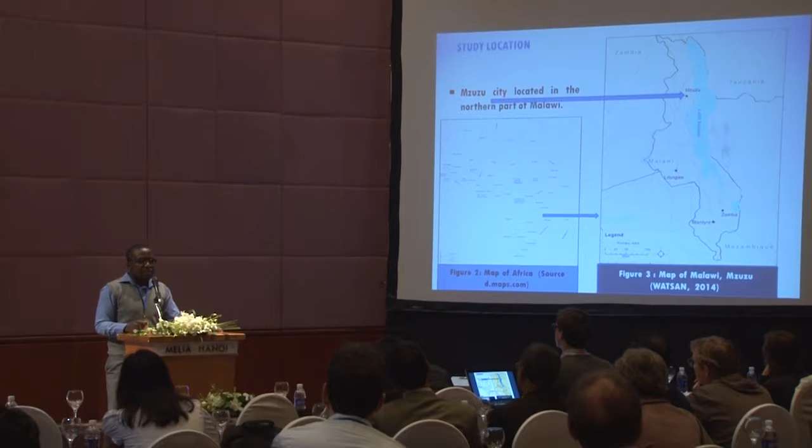The major challenges being experienced in Mzuzu City is lack of appropriate pit desludging technologies. In Mzuzu City, there are vacuum tankers that are run by the municipal authorities, but also by private operators. These vacuum tankers mainly patronize the planned areas and empty septic tanks.

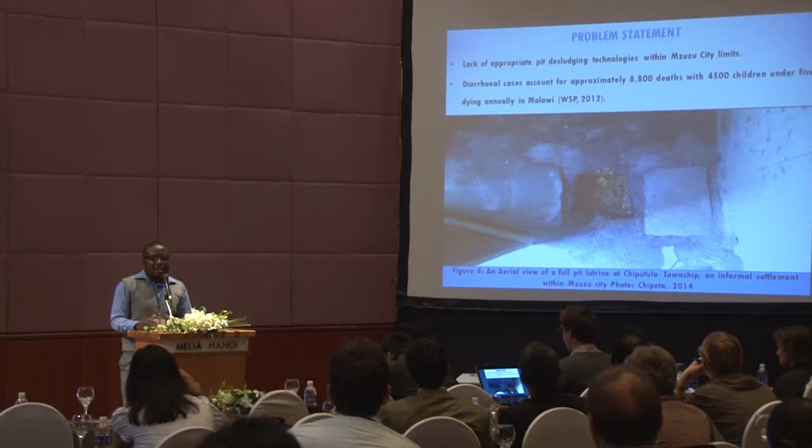Here is just a picture from one of the informal settlements, Chiputula, just to highlight that this is an aerial pictorial view of a full pit latrine, which we try to alleviate by possibly suggesting physical technologies that are relevant and contextual to Mzuzu City.

Just a bit of background. The main criteria focused upon on the technologies is that we thought of developing a technology that is low cost, effective, safe, and sustainable. Within these parameters, when we did the literature research, we focused upon modification of the treadle pump.

These are pumps that are normally used for irrigation, and they depend on the suction power to empty, and they use treadles that manipulate a rope which is surrounded by a pulley, and they use piston strokes that move up and down. The upward stroke sucks up the sludge in this case, and also the downward stroke pushes the sludge so that it can move to the discharge pipe.

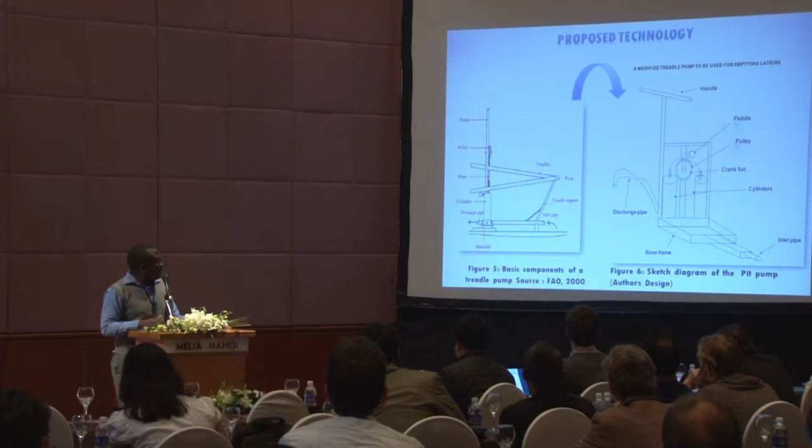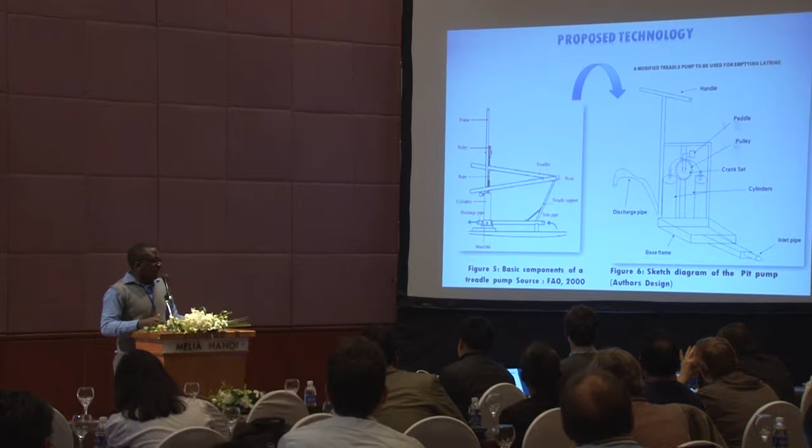So, on the other part is the sketch diagram of the pit pump, which is the conceptual setting. What we did is just to replace the rope with a bicycle chain, and also to put pedals instead of the normal treadles that are there, so that we can see if possibly this can also be used as another technology for pit emptying.

Discussion on the changes we have made regarding the pros and cons of the technologies are as follows. Firstly, we believe that the technology can potentially be low cost and sustainable because all the materials being used are found available locally, whether it is the chain parts or the other nuts and bolts, available in many shops in the developing country context.

Again, we believe that it can potentially be easy to operate because it can be almost like using a bike, so that it is literally something that people can easily adopt and use.

On the safety part, we are looking at the possibility that because the treadle pump allows you to just insert a hose in the sanitation hole, you can possibly cycle outside the pit latrine. This can be helpful, especially in unlined pit latrines, where emptying from inside the pit can potentially cause the surrounding pit to collapse due to weakening.

Finally, we thought that for this technology, the major advantage can be that pumping with leg muscles can be potentially more useful and less straining than using upper body strength.

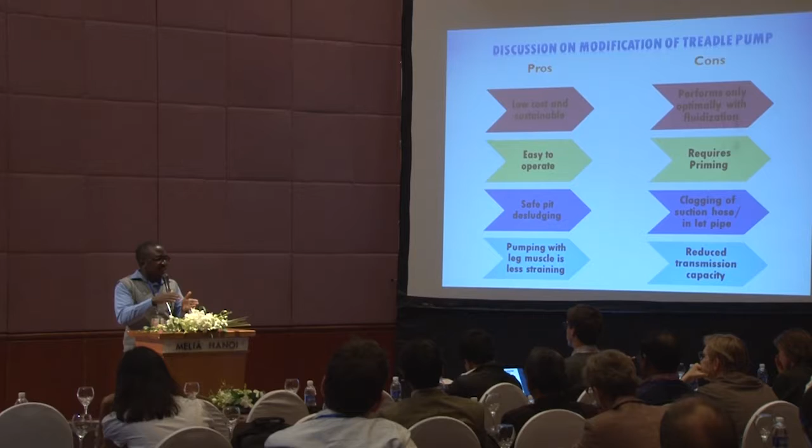This concerns the material itself that we are pumping out. When moving through the suction hose, materials such as sludge can possibly stick to the inside of the hose, reducing the actual working flow and possibly reducing the flow that can pass through.

Armed with that conceptual design, and trying to test out the concept further, we took the concept and started to gather the materials, showing the fabrication cycle. We went to some local welders to show them the design, which in the first instance, as we tried it, did not work.

We had to make some modifications on site, brainstorming on the feet, and test it on some light mud slurry to see what is happening. This was seen as an opportunity for reviewing the design for further phases.

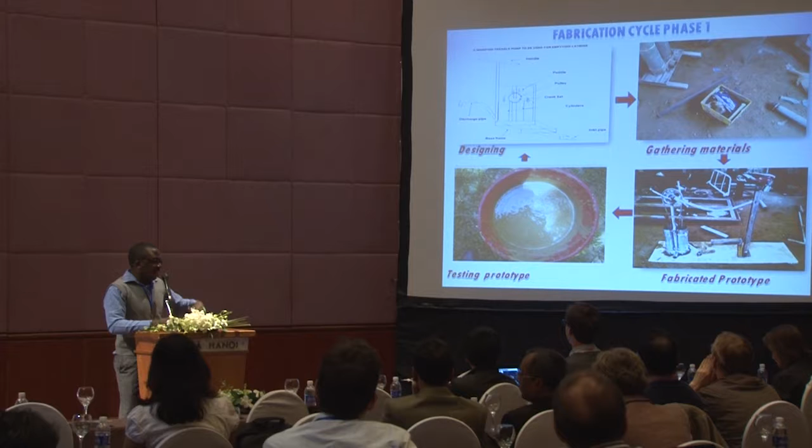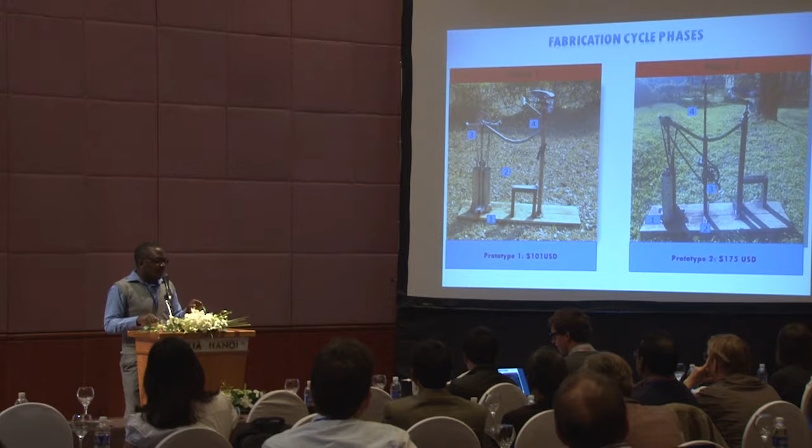In phase 2, we also added a metal rod to hold the crankset, and the position of the crankset has changed, because in phase 1 we were only able to do the half cycle motion, which was a bit straining. In the second phase, we are trying to accommodate a full cycle motion, which we believe can be more useful and easier to operate.

The fourth change is just the changing of the handle positions. Now we will show the video of what we did and what was observed.

In the next phase, what we are trying to do is optimize the pump design, looking at the efficiency, the energy requirements, and the economics, so that we can potentially have a design that works. This can potentially be done by December 2015, which is our deadline.

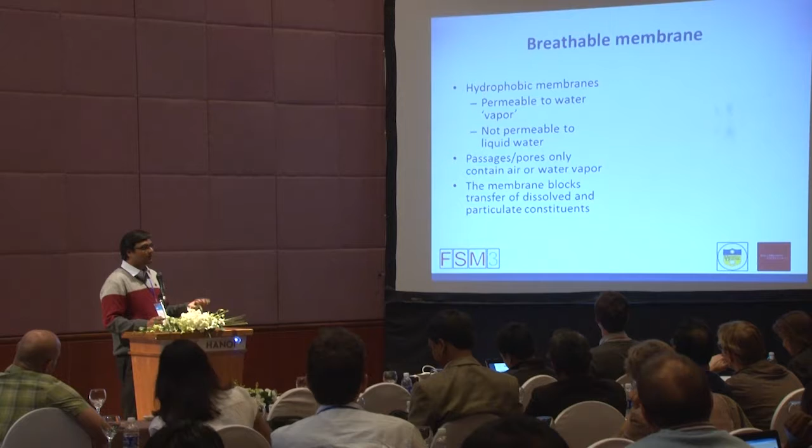So in the start, I would like to define these breathable membranes and what they do. These are pretty much hydrophobic membranes, and the property is that they are permeable to any vapor, like water vapor and air, and it is not permeable to any liquid, like liquid water, and dissolved contaminants present in the fecal sludge. The beauty of this concept is that the pores or passages in these membranes kind of hold only air and the water vapor.

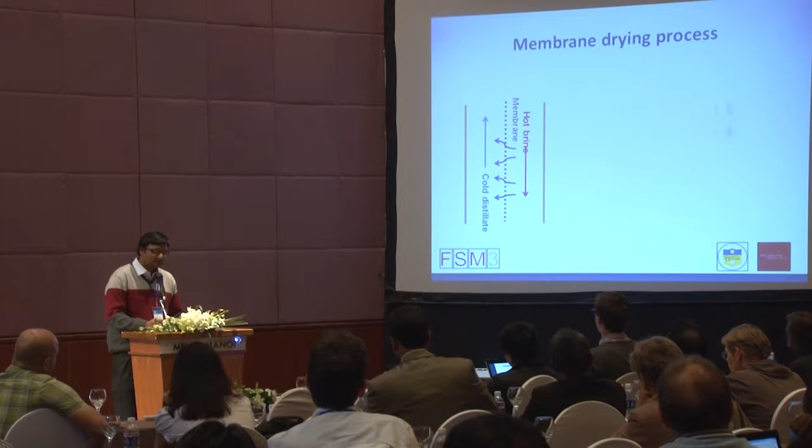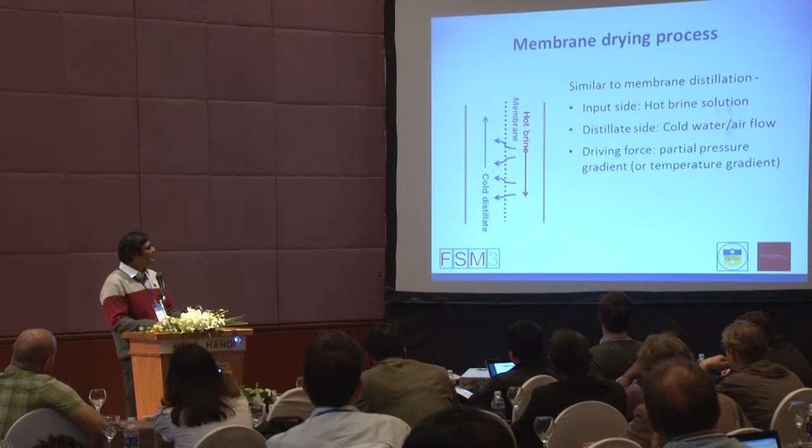So to describe our process, I would like to go through the membrane distillation process first. It is extensively used in desalination processes around the world. We have the membrane in between, with the hot brine solution on one side and the cold distillate solution on the other. Due to the partial pressure gradient or temperature gradient, there is a gradual flow of water vapor from the hot brine to the cold distillate, thereby getting us a concentrated salt solution and a dry solution on one side.

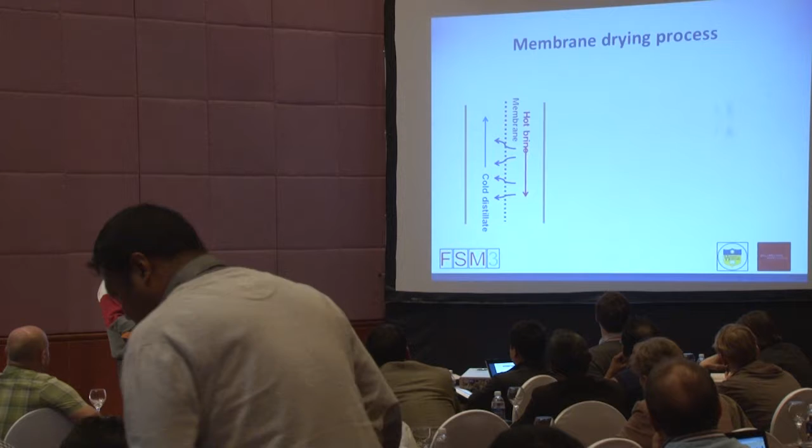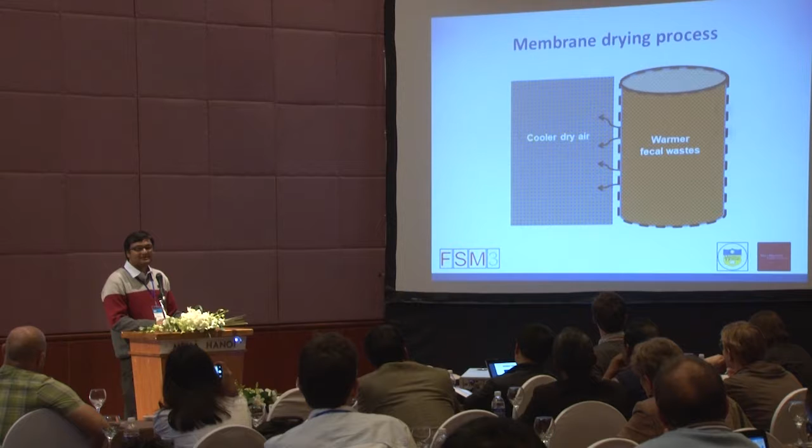To apply this to our context in management of fecal sludge, you can imagine a 55-gallon drum of this breathable membrane, which would have warmer fecal wastes. You have cold dry air on the other side, and as the process indicates, there would be a gradual flow of water vapor through the breathable membrane, and you would have dry fecal matter on one side and pure water on the other.

In terms of field application, we would be testing this membrane system in India, where we plan to start our field testing in Kanpur, in two families, in two locations, two slum areas.

So it's a simple process. You have a squatting toilet, and you attach a perforated drum containing this membrane liner, and with the cool dry air on the outside, you would get drying of fecal sludge as it gets collected during the treatment.

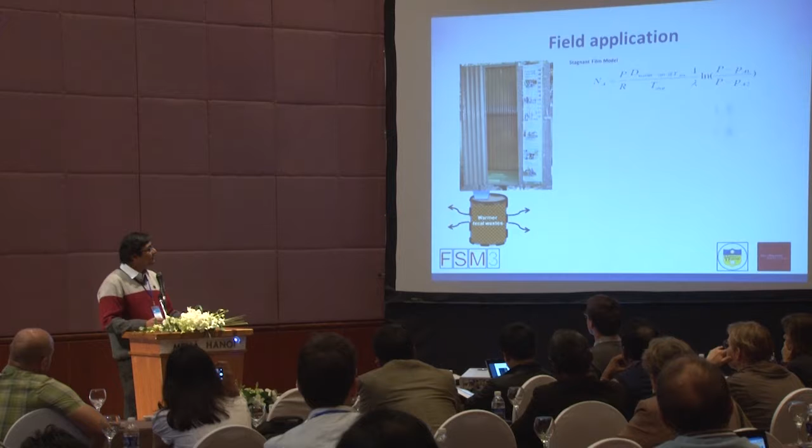Now to get to the sciencey part of it, I'd like to point out that this is what I've been doing for the past 2 years, basically working on trying to describe this process a little better. We now know the equation that governs the flow of water vapor, and it's the stagnant film model that we want to look at.

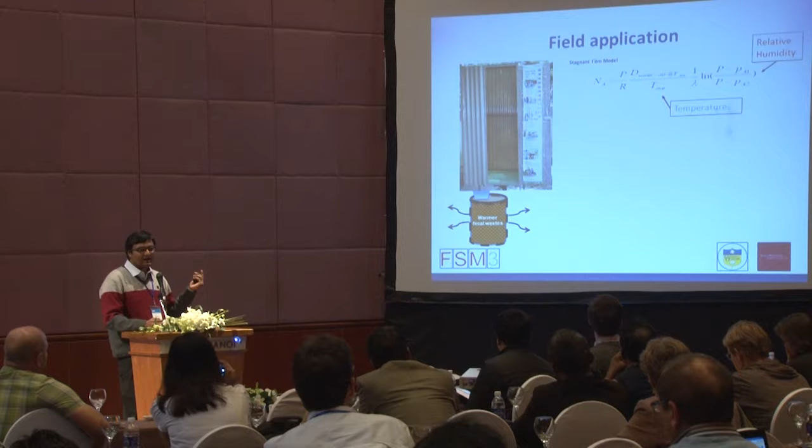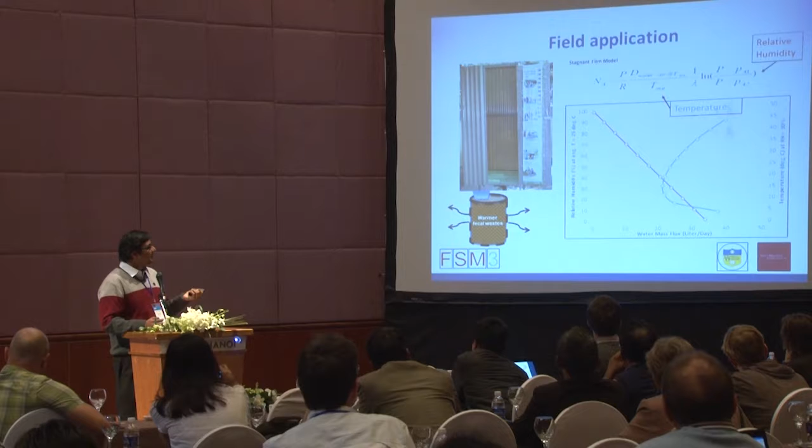As you can expect, it has two major parts that govern this equation: the relative humidity on the outside and the average temperature across the membrane. To give you an idea of how these two variables affect it, this is a simple graph which points out that as the relative humidity decreases, you would have an increase in the water mass flux, and essentially you would have a higher drying rate when you have a higher temperature or an extremely low relative humidity.

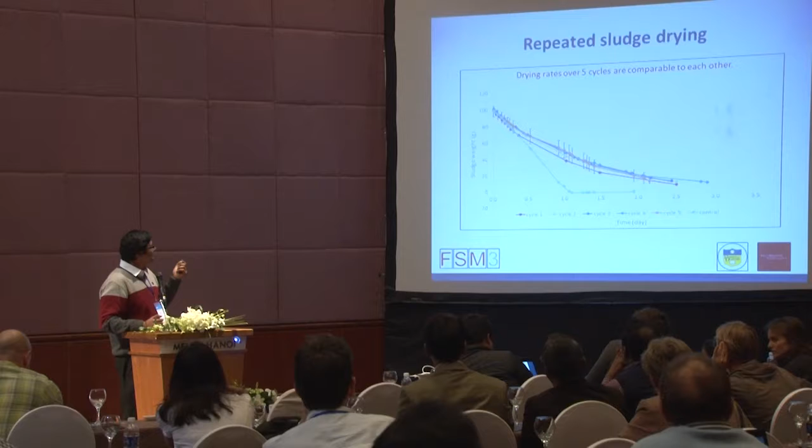So we tested this on a small scale system in our labs, and we've done this a few times. This is a 5-cycle test where we tested one simple membrane with fecal sludge over 5 cycles, and as you can see, the drying rates or drying characteristics are very similar to each other. Over a period of 5 cycles, we did not see much change or loss in performance.

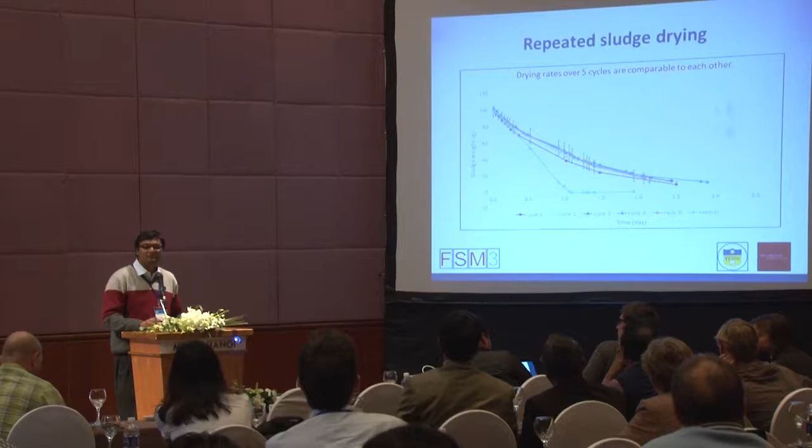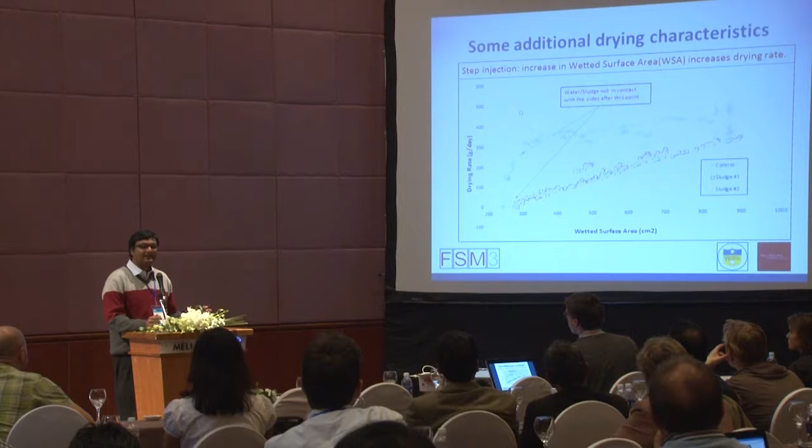We also did some step injection tests, which are more applicable to field application in India. We had a small opening going in and increasing the wetted surface area, which is in contact with the outside air and the sludge. It was indicated to us that increasing the wetted surface area increases the drying rate, which was a good sign.

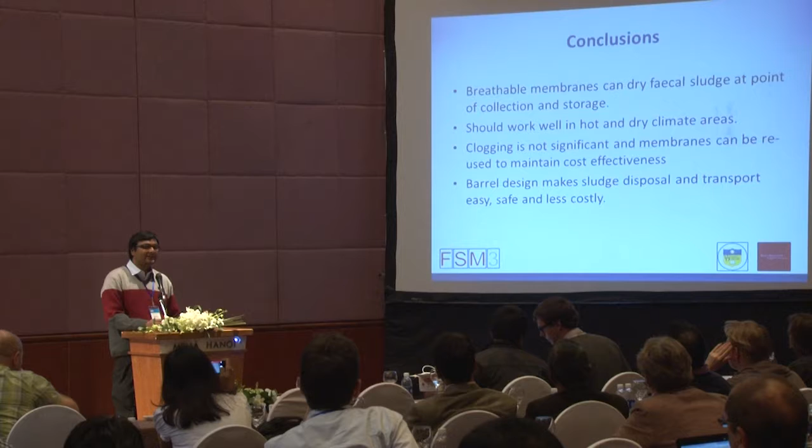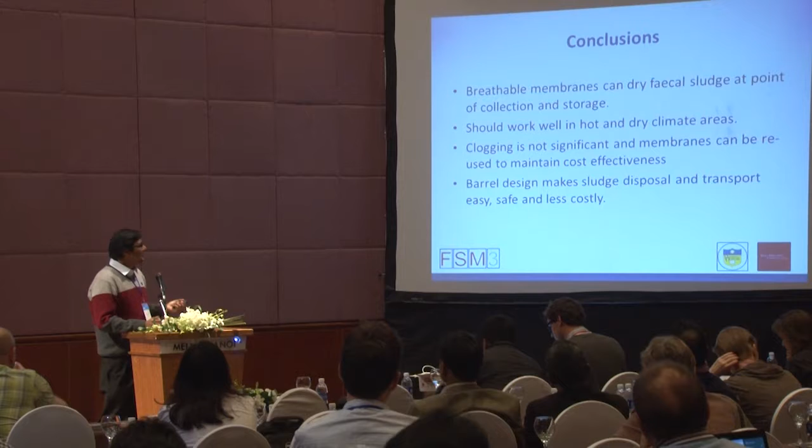In conclusion, breathable membranes can dry fecal sludge at the point of collection and storage. It should work well in hot and dry climate areas. Clogging is not significant enough to affect the process even after five cycles, hence it is reusable and cost effective in the long run. And the barrel design makes sludge disposal and transport easy, safe, and less costly.

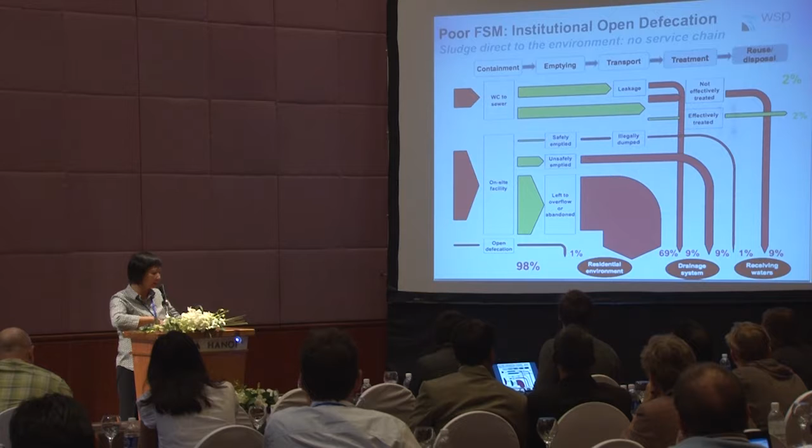So this is an overview of our process. Mixed waste comes in, we have a passive diversion process that dewaters the solid - that's the passive diversion and sand filtration. This is what we showed in the Delhi toilet fair back in March. The liquid goes into the heat pasteurization tank, and the dewatered solid is flash dried and then convective dried. Sorry, the formatting got changed when we switched computers. So the solid gets dewatered in one step in diversion and filtration, then it gets dried, and then the dry solid gets smoldered. Essentially, we're drying the solid and we're burning it. It sounds really, really simple. That's it, just dry and burn.

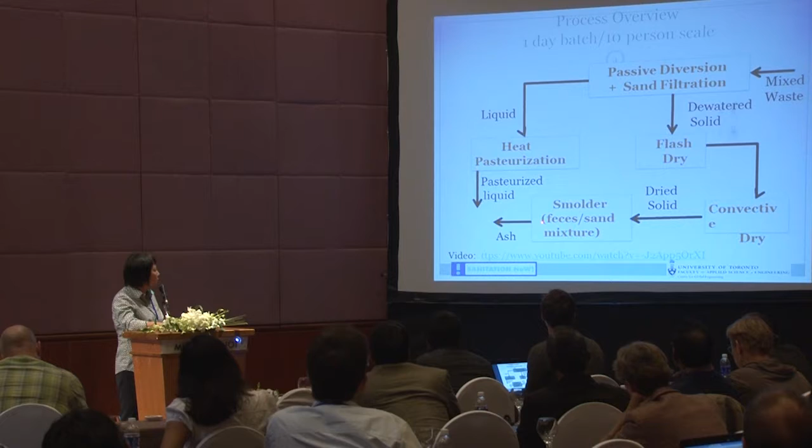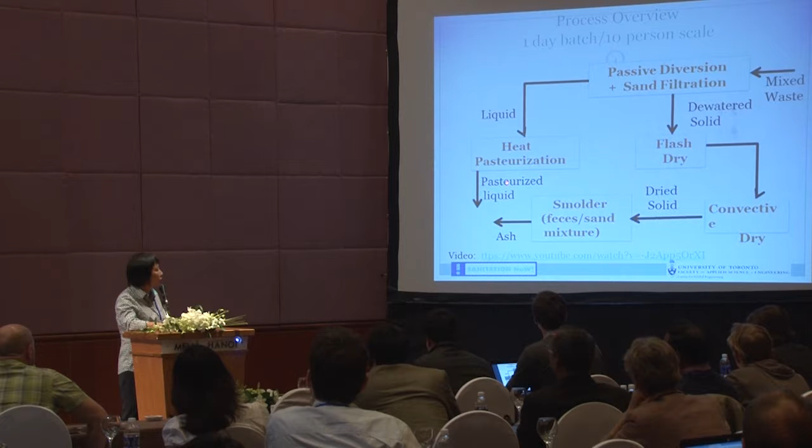What we get out of the smoldering process is essentially the inorganics of the feces. The feces is completely destroyed. The temperatures in the smoldering reactor get up to 600 Celsius, so pathogens are gone, the solid waste is gone, and the liquid is pasteurized. In the phase 2 process, it spends close to 24 hours in a 70 degrees Celsius kill tank.

So let's talk about the smoldering a little bit more. In there, the smoldering has a feces and sand mixture.

So smoldering, for those who haven't heard me talk about this before, the actual chemical reaction is the same as a fuel reacting with oxygen to form CO2 and water if it goes to completion. But instead of an open flame reaction where the fuel is volatilized and reacts with oxygen in the gas phase, a smoldering reaction takes place at the surface of the solid fuel. So oxygen has to get to the surface of the solid fuel and react there. The difference from an open flame is that it's a more controllable, slower process.

You have to provide porosity so that oxygen can get to the surface of the fuel. Feces, being a soft material, is compressible, so a pile of it won't let air reach the surface of the fuel very well. So we mix the fuel with sand, and the structure of the sand provides porosity so that oxygen can get to the surface of the fecal mass. That's why we use a feces and sand mixture.

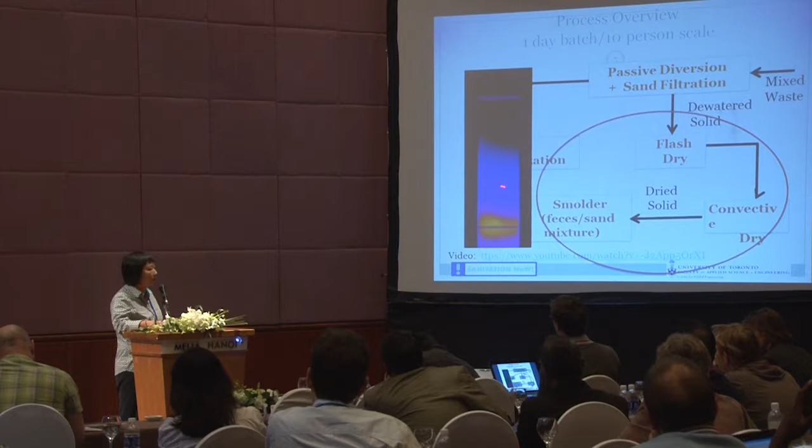This is an infrared picture of a batch column of a smoldering process. We ignite the fuel and sand mixture at the bottom, and as smoldering takes place, it happens in a very controlled fashion. The smoldering front, indicated by the red color, moves up over time, and as time proceeds we finish burning the entire bed of fuel in that column.

That's basically how smoldering works. I've drawn the circle here—there are a lot of different steps, but I'll point out that in phase 2, what we showed at the Delhi toilet fair, the flash drying, the convective drying, and the smoldering all take place in the same vessel. It's a single chamber. That's the overall process.

As I said, with smoldering we make use of sand. Even though sand introduces complications in material handling, we take advantage of the fact that the sand can act as a thermal battery. When we generate heat by burning the fuel, a large fraction of that heat can be stored in the sand. So we think of that sand as a thermal battery.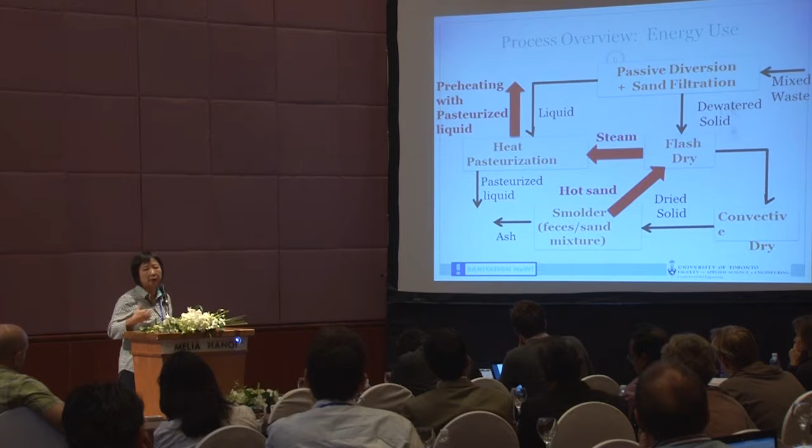So the energy management aspect of what we're doing: we store the heat generated using the hot sand as a thermal battery, and we use that heat once to flash dry the feces, a second time to heat up and pasteurize the liquid, and a third time to preheat the liquid going into the tank.

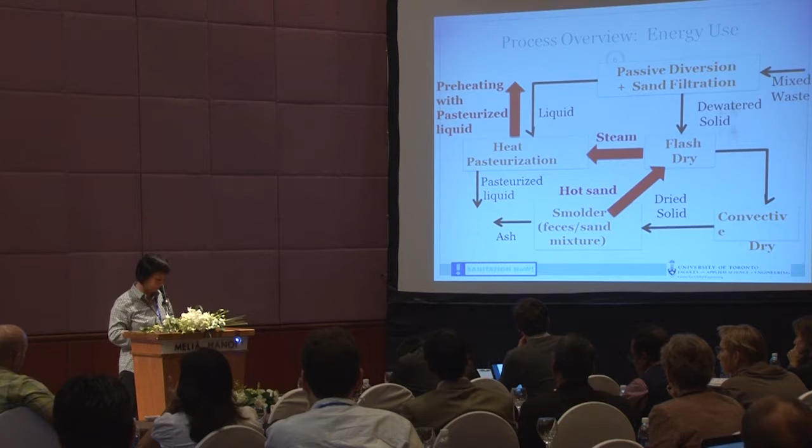There are a few things that we didn't like. One was too big, and obviously at this size it would be kind of expensive. But we also didn't like the amount of energy that it used, 4 megajoules per day.

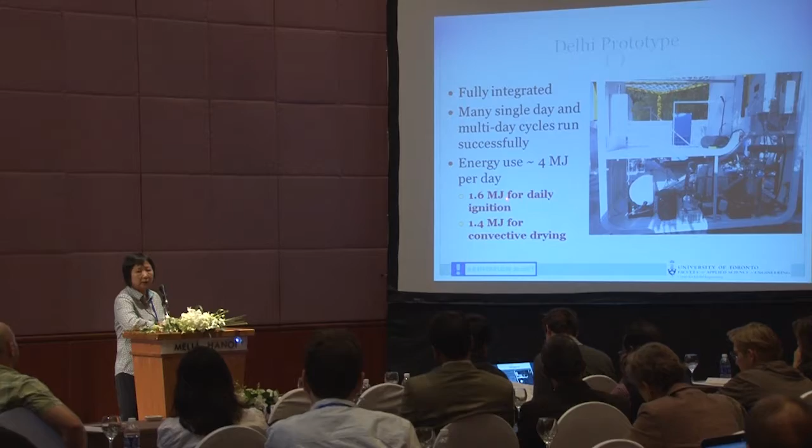And we did a very careful analysis of where all the energy costs came from. The two biggest energy cost items were the daily ignition. To ignite, to get the smoldering process going, you have to ignite the fuel at the bottom. It took 1.6 megajoules for that every day. And the second was 1.4 megajoules for convective drying.

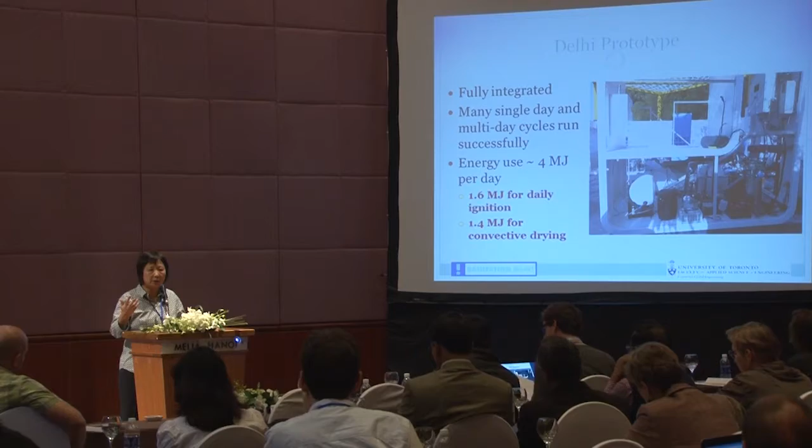So what happened was that even though this flash drying worked really well, it didn't get the feces dry enough to the point where it would smolder. So we then would pump air through this mixture in order to finish drying to the point where we could. This actually turned out to be, in hindsight, a really stupid thing to do. It's very inefficient and cost a lot of energy. I won't go into all the reasons why, but that's why.

So the lessons we learned from all that at the end of phase 2 was, and there are many things, but I'll just highlight the things in red. We like the fact that we use sand as a thermal battery, and as I said, we were able to make use of the heat generated in a very efficient way. We like the process of flash drying because it was so fast.

The things we didn't like: the energy we had to spend to ignite the fuel every day, and we didn't like convective drying. Not just because of the energy cost, but also if we're bringing air from the ambient in order to dry the fuel, then that process will be very dependent on the ambient conditions. Under high relative humidity conditions, that process will become even slower. So we want to remove convective drying in the next step of our process.

So just to say a little bit more about the drying and dewatering aspect of things. Healthy feces is about 3 to 1 water, 75% moisture content. Our smoldering target, if we can get it down to 1 to 1, then we could burn it very robustly. We could do it at 60% as well, which is about 1.5 to 1. But 1 to 1 is a robust number.

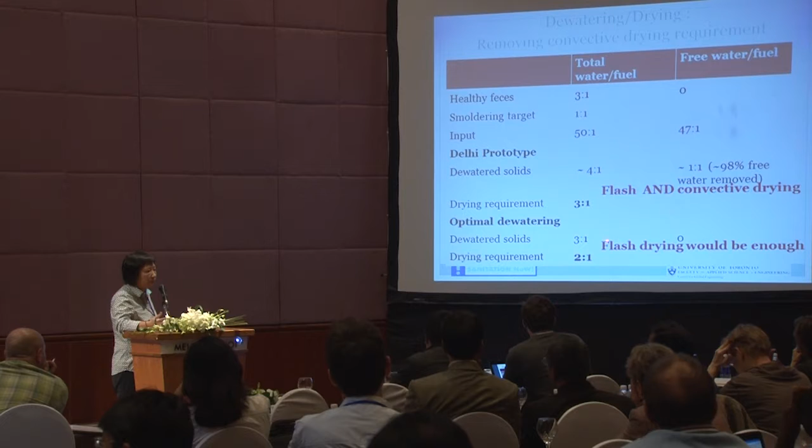We got rid of about 98% of the free water. So if you compare these two numbers, that's great. But the energy we had in the hot sand wasn't enough to flash dry this 4:1 down to 1:1. But if we were able to remove all of that free water, then the water to solids would be about 3:1, and our drying requirement would get down to just 2:1. At that level, we would have enough energy in the hot sand to flash dry and not have to do that extra drying.

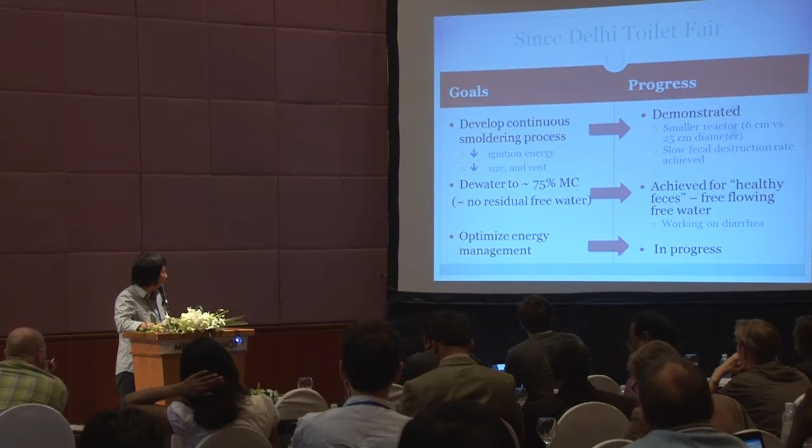Since the Delhi toilet, and I can't share all the details with you yet, so just at a very high level, we have been able to develop a continuous smoldering process. This is one of our big goals, because that will then reduce the ignition energy. We wouldn't have to ignite every day, and it would also reduce the size and cost.

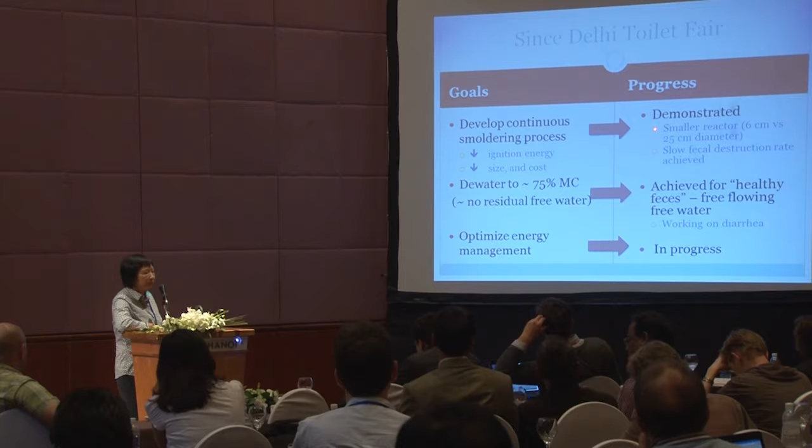So we've been able to do this. We're very happy with this particular progress. And the reactor that we're using now is only a 6-centimeter diameter reactor.

We've been able to show that if you run this process continuously at a 10-person scale, you're only processing about 30 grams per hour. Imagine trying to keep a continuous burn at that slow of a rate. We've been able to achieve about half of that.

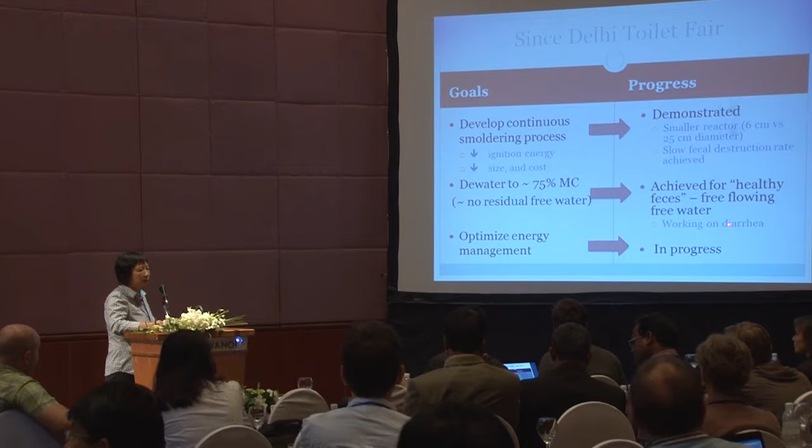We've also been able to dewater down to about 75% moisture content. So we've been able to do this for healthy feces, and we're trying to work on what to do with diarrhea. Some changes happen once we move to a continuous process, so there's some tweaking we have to do with the energy management. That's in progress.

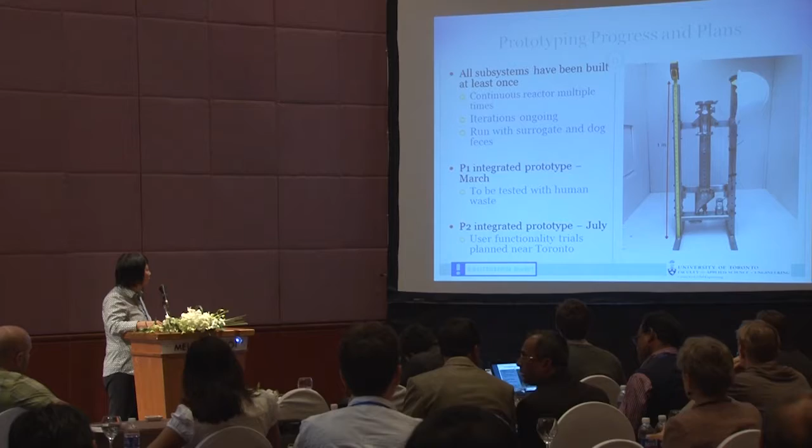The final system's estimated electricity requirement is only about 0.15 kilowatt hours per day. The key here, to tie it back to the initial point, is managing the energy efficiently so that the amount of extra energy needed through solar panels or so forth is minimal. That's the final point I'll make on that. And that's it.

Thank you for that presentation. Do we have any questions? Louder than before.

I was wondering, how do you separate hot sand from the solid inert sludge, since you are returning it? As the smoldering front moves up, the material above the front is a mixture of sand and feces, while the material below the front is just clean sand, since all the feces has been burned off. So we make use of what's underneath.